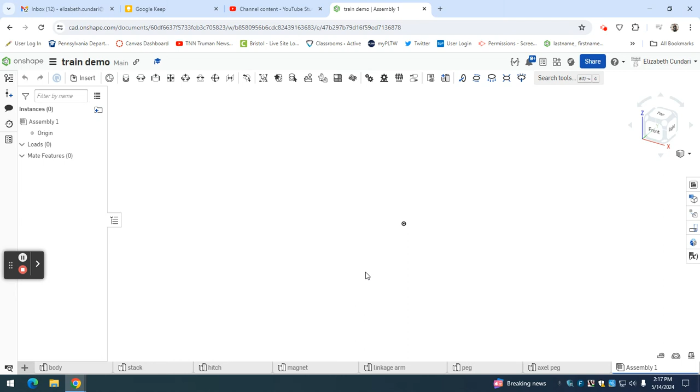All right, guys, we are going to work on the cow catcher. So far we have axle, peg, linkage, arm, magnet, hitch, stack, and body. If you don't have all of these yet, that's okay. You will get there if they're being assigned in a different order. But here we go. So we're going to go to a new tab, Create Part Studio. And we are going to right click and hit rename and call this one cow catcher.

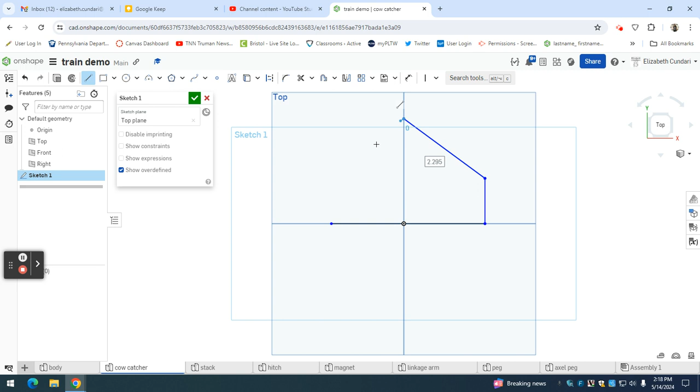So it does not catch cows, it pushes them, but they call it a cow catcher. So it protects the train from derailing if a cow were to be on the tracks or anything of that size. And so we are going to go ahead and go to sketch, and we're going to work on our top plane. So click on your top plane, top on your view cube, and then the shape is kind of like this. We have a straight line, we go straight up, we go to the center, we go back this way and straight back down.

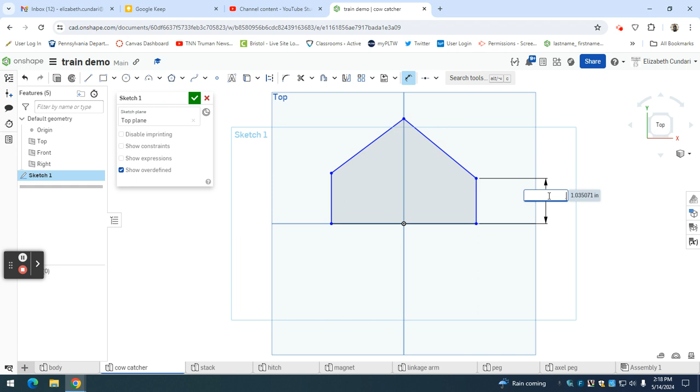And if it doesn't quite work out straight back down like that, you can do that and do that, right? So that we know that that's all good to go. We can also do this point to this point, which then means those two will be aligned like that. And let's throw in a midpoint. So we'll do this line to this point so that that's all nice and centered. Let's throw the dimensions on here. So this is going to be 0.25. And see how I didn't do both of them? So let's go back to this. Go back to your horizontal constraint and make these the same.

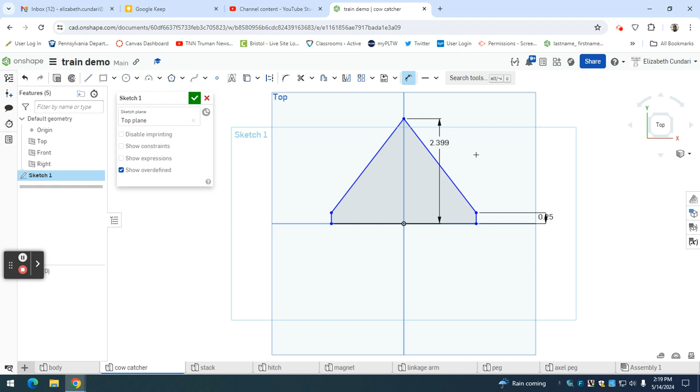Okay, let's go back to our dimension. And then for the dimension on this, it is 1 inch. So we will go from the point to this point. There you go. And you get your 1.

All right. Oh, there's the bell, guys. Yep, we are in school.

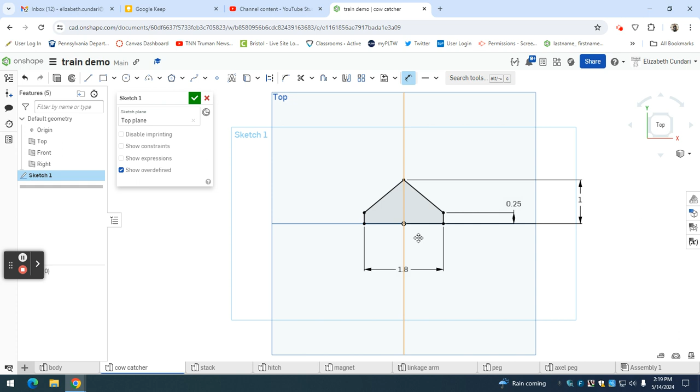Okay, so then this dimension here is 1.8. And that's it. See how it's all fully defined? We have our 1, our 0.25, our 1.8. These guys matchy. That's my new thing. And it's good to go. Hit check.

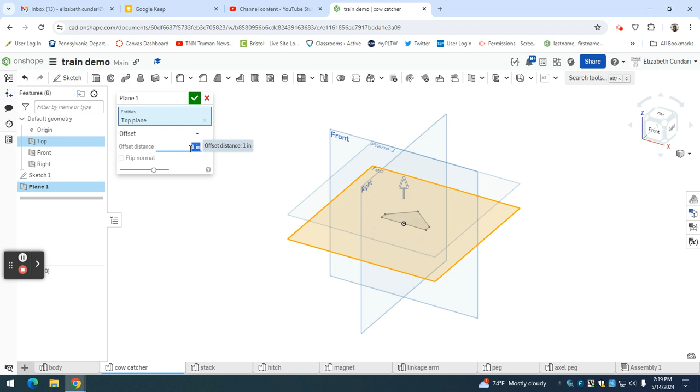Now, let's go ahead and do a projected plane. So I'm going to go here to offset plane. And I'm going to project this thing up. So we're going up a distance of 0.75. And we're going to hit check. And then I'm going to sketch on that new plane. I can click it this way, or I could just select it on the left. Hit top. And let's throw in these lines. So I am going to do what I did before. Like this. So I'm making that shape again.

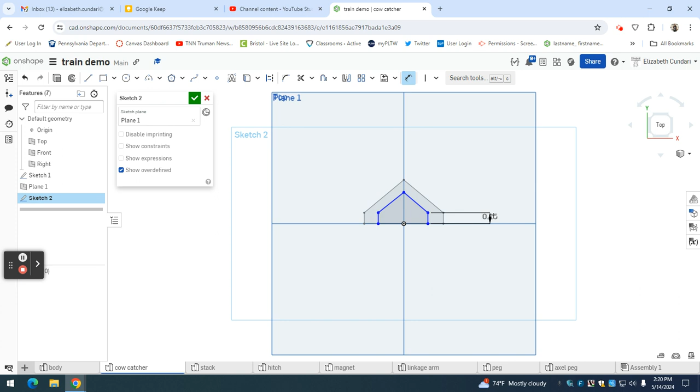I'm going to go ahead and do a vertical constraint on this line and this line. I am going to do a horizontal on this and this. And I am also going to do a vertical on the center point to the origin so that it's nice and lined up. Then I'm going to go ahead and dimension this. It is going to be the same dimension as the other one, so 0.25. And then this dimension is going to be 0.75.

And what else do I need? Oh, the distance from here to here, right? So what is this? This is 1.2. Okay, that looks good, but it's not fully defined. So I'm going to go back to my midpoint. I'm going to click on the point and then the line so that it centers it in. And then I see that it's fully defined. And I know I've done everything I need.

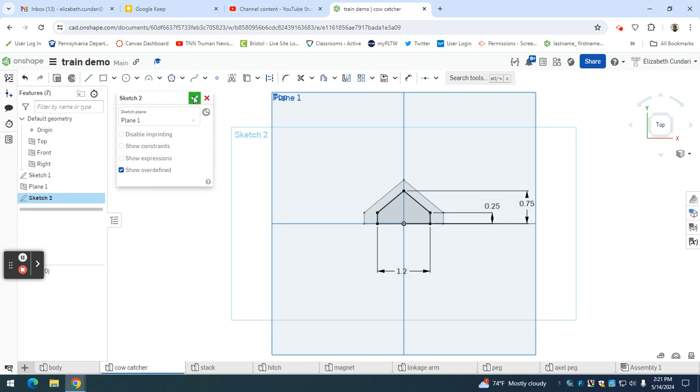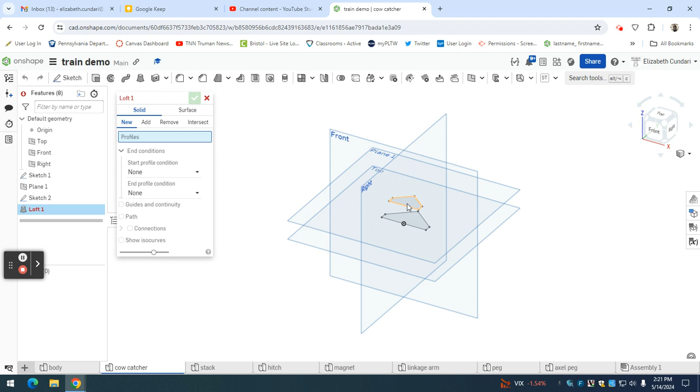That looks good. I'm going to go ahead and click on this corner, right? So it's like the top. I'm in the bottom right part of where the word top is. Brings you into almost like an isometric that works for us. We're going to loft this. Now, something new has happened with loft, and I just want to show you. So we're in solid, we're in new. If I go like this and then like this, that looks fine. Top to bottom's fine. Let's see if it's going to work the other way, if it was just some weird glitch last time I did it. Nope, fine this way too.

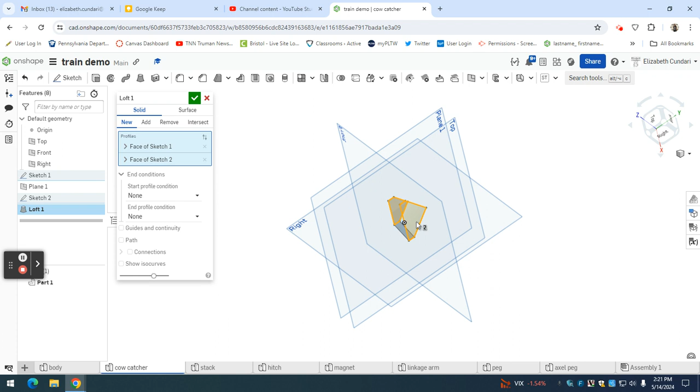All right, if it goes all twisty on you, which it did on me the one time, then go right ahead and go in the opposite direction and it'll sort itself out. Today it's going correctly for me, so. That's how it is, right? When you want to show it off, it doesn't happen.

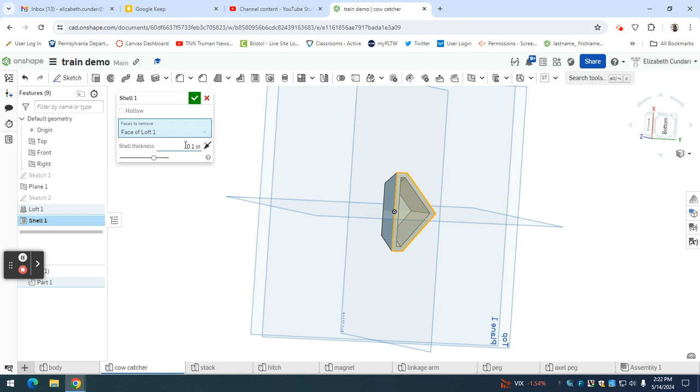Okay, so now that we have this, we're going to shell the bottom. Sorry, I almost did something else first. Let's shell this. So this shell is going to be 0.10. So mine naturally did that. So if yours does that, you're in good shape. I like it. All right, now let's go back to what we were doing up here. Okay, so we are on the right side, kind of angled. We're working on this little guy here. So I'm going to sketch on that. And I'm going to go ahead and do an offset.

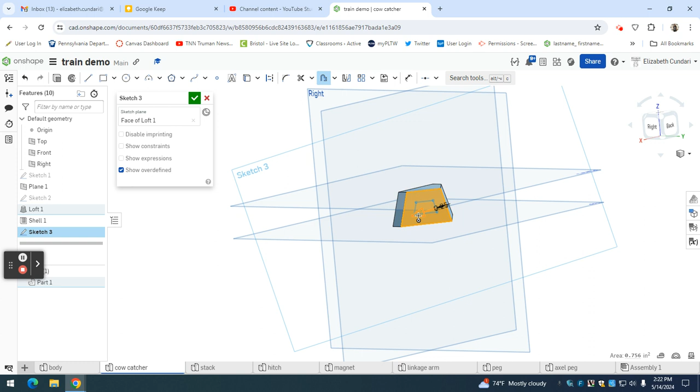So I'm going to select all of this, but flip it. Okay. And then that offset is something very important. Yeah, 0.1. Enter, hit enter, and then 0.1, and then enter again. So that gives you that. Hit check. Then we will go ahead and extrude, remove, and we're only doing a little bit on this. We're only going to do 0.05. So that looks good. Hit check.

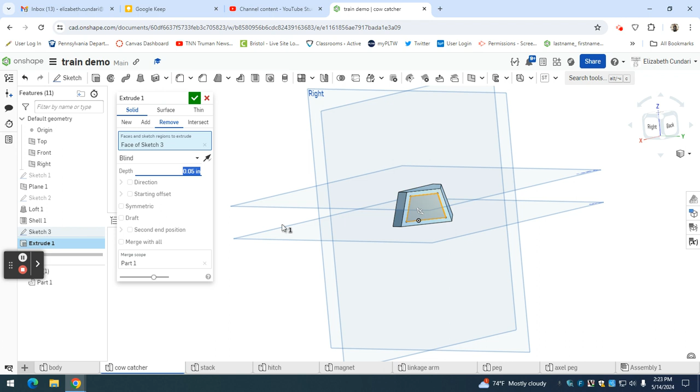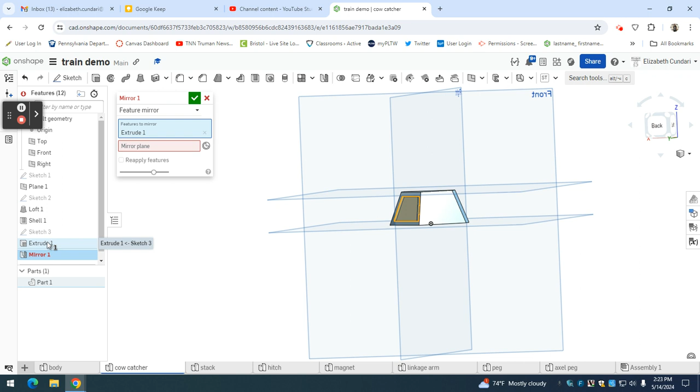I like it. So I want to have it on the other side, and I'm feeling like I want things to look a certain way, you know. So I'm going to mirror it. I'm going to go to my feature. Oof, almost forgot again. I'm going to go to this extrude. And then when it says mirror plane, I'm going to pick the one that's going right down the middle. So that one in this case is this one, right? So I'll click on that. And then there you go. Did it on the other side. Doesn't that look good? Now we just have to do the pegs in the back.

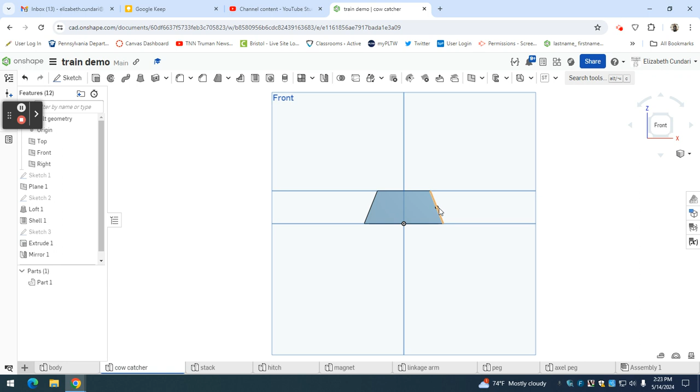So the pegs in the back match the train body's front. Let me click over here for a second. These 3 holes, we're matching that to this. Okay, so just in case if I do something dimensionally weird, we're going to know later. So I'm going to go ahead and do a line tool, and I'm going to do this. And I am not doing anything with midpoints or any kind of weird connections there. It's being weird. Okay. Then I'm going to go here and go straight up. See, that one looks good. The other one I'm not so sure about. Let's make that other one horizontal just in case. Okay, I guess it's good.

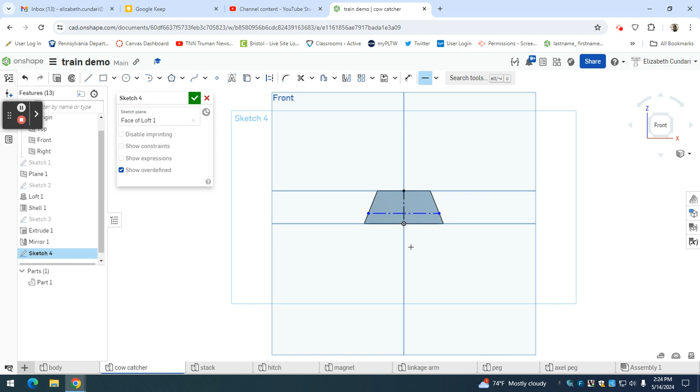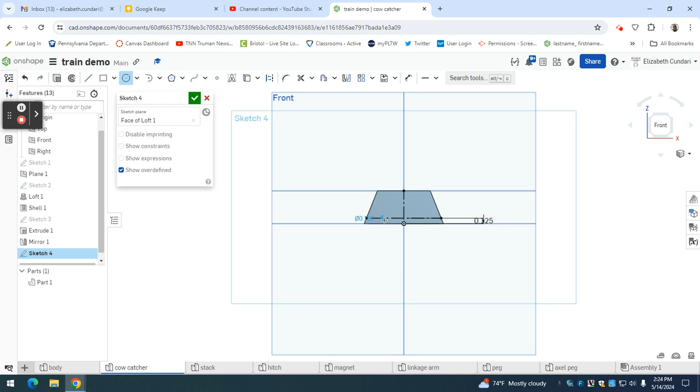So that dimension is the same dimension as we did on the train. So it was that 0.125 height. That looks good. Now, again, you could do drill hole. You could do different things here. I'm just going to do circles. So I'm going to pick this guy here. I'm going to do one here. And I'm going to do one here. And again, I could mirror here, like in the train one, I talked about that I could have done it, but I didn't.

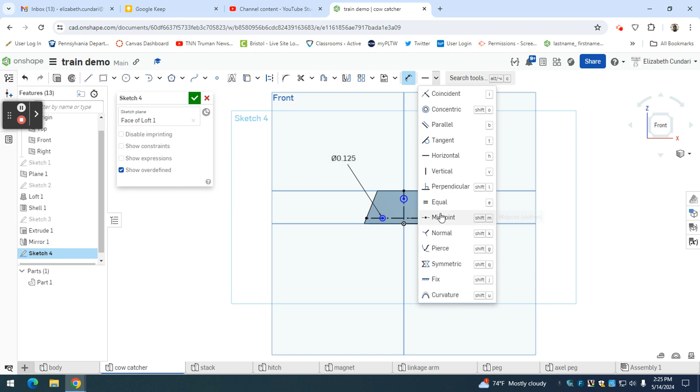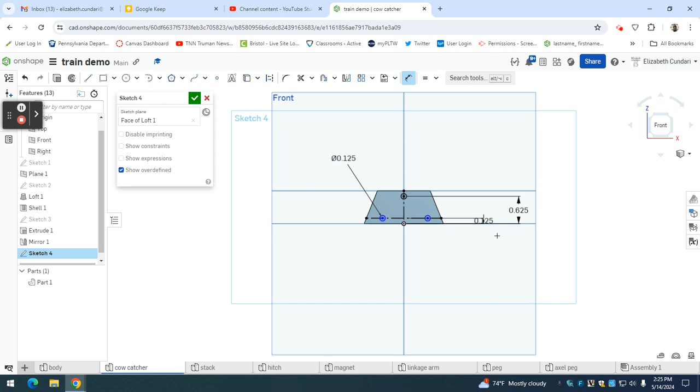0.125, which is fine. So I am going to equal them again. So this one equals this one. And this one equals this one. So now they are all the same size. So if I go to change anything at any time, they're going to be connected. The other thing I need is the dimension from here to here. So let's get that guy in there. And that is going to be 0.625. And then let's do some dimensions from here to here.

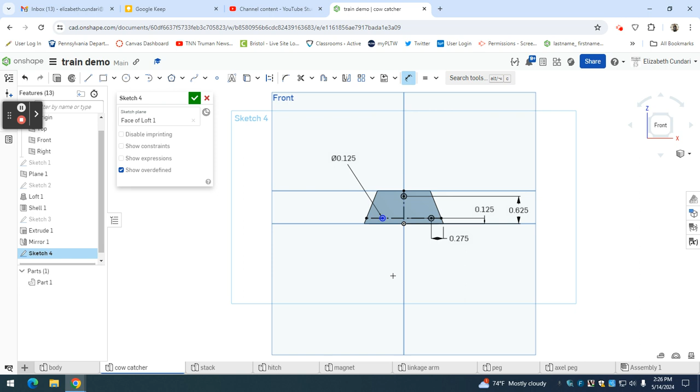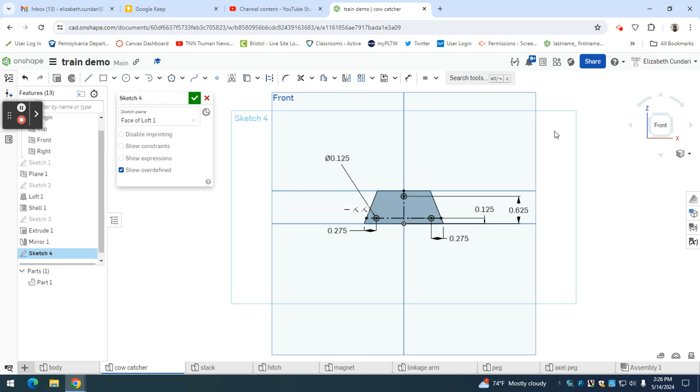We're going to do, ooh, that is just crazy. Okay, I'm going to click and then move it after. It's 0.275. All right, so if you can't see that, there you go. That's better, right? Oh, I should have done that with this one too. And the same thing on this one. You could dimension from this corner over, or you could just do the same thing, or you could mirror it originally. All of those work. Okay, so now that I have that, that's all set. Everything looks good. It's all defined. I can hit check, and these guys are going to get extruded out.

So these are the pegs that actually stick out. So we have this. They don't stick out that much. They're only going to stick out 0.125. That looks better. And then just to give them a little bit of love, we're going to put a little chamfer on them. It's funny, this chamfer is very detailed, so let's do it. So we get the little circles here, right? The outside circles. So the distance is going to be

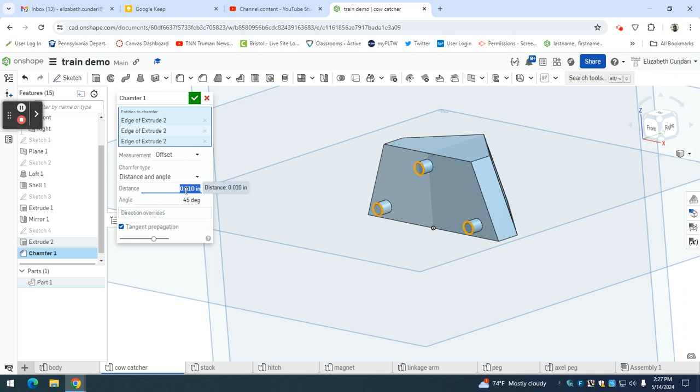0.010, and the degrees is 45 degrees. So if you have the 45 degrees, you're good. So this is distance and angle. So 0.010 and then 45 degrees. Hit check, and there you go. Again, this is a toy. Remember, we're looking for it to look cool.

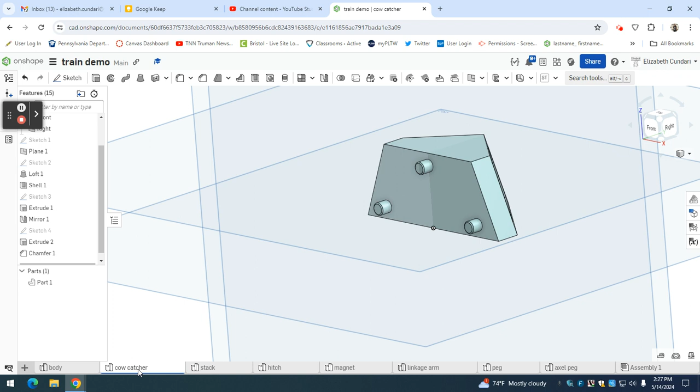Oh, maybe we'll go with this because now we've got this whole cyan thing going. Purple and cyan. I don't know. Makes sense to me. Okay, so the cow catcher is done. You're almost there, guys. All you have left is the wheel if you're following my way.